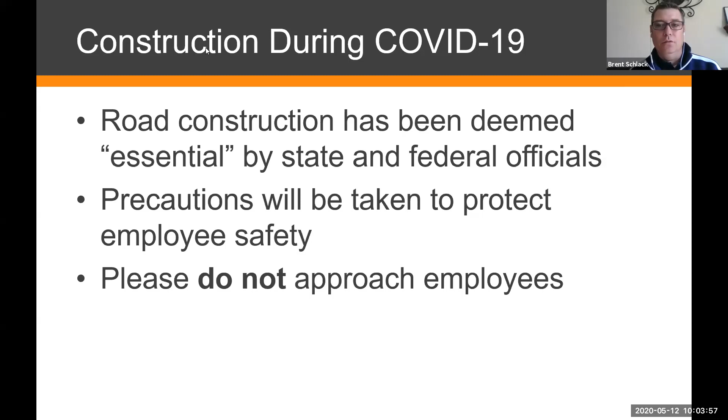So we're here for the Textile and Woodland Roundabout project. If you can move forward to the next slide—just some background on the project.

We applied for a safety grant through MDOT, actually back in August of 2017, so it's been a little bit of time. That was through me and my staff where we applied for it. Unfortunately, the safety grants are reactive type grants, so based on the crash histories and some of the crash patterns that we've seen out there, that's the reason we applied for this money.

During this process, we applied for two scenarios: a center left turn lane on Textile Road turning onto Woodland, and then our preferred alternative, the roundabout, which is what got selected.

The funding was awarded in February of '18, and since that time we've been working through design plans leading up to construction. The grant we were awarded was a 90-10, meaning 90% funded federally and 10% matched by the locals.

This 10% match is being shared between us at the Road Commission and the City of Saline. Also, this grant can only be used at this location—it's a capped grant. So what that means is we have a certain amount of funding, and anything above that amount is the responsibility of the locals.

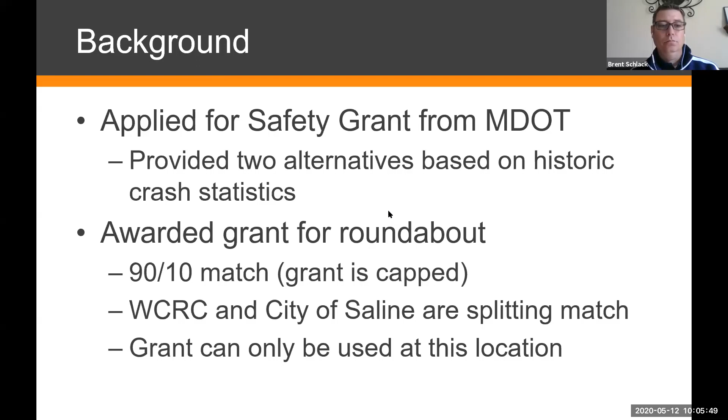Go ahead and move to the 'why a roundabout' slide.

The reasons that we started a roundabout were due to the history of some of the crashes that we've seen at this intersection, and some of them have been serious. Unfortunately, we had those serious crashes, and roundabouts do an excellent job of reducing or eliminating these serious, severe crashes. It also provides some traffic calming.

The roundabout slows the traffic down as you enter, and it can reduce congestion and help traffic move more efficiently. Another reason that we like the roundabout is just to the east of the intersection is a pedestrian crossing.

The roundabout fits really well with this pedestrian crossing because we can have a splitter island, and Michele will go through some of the construction on what those are. But those splitter islands provide some refuge for the pedestrians and allow them to cross one leg of the intersection at a time, or one leg of each lane at a time.

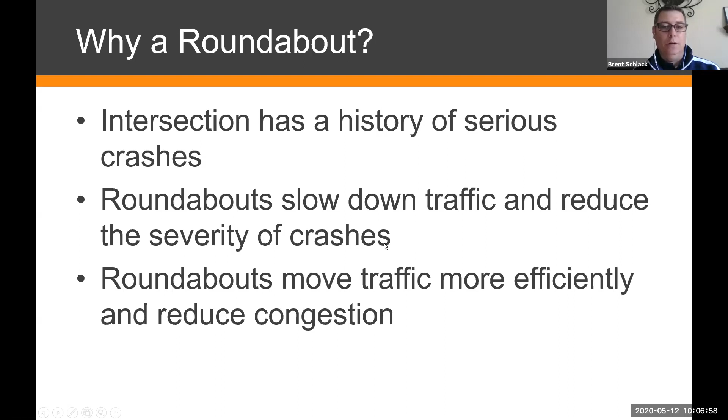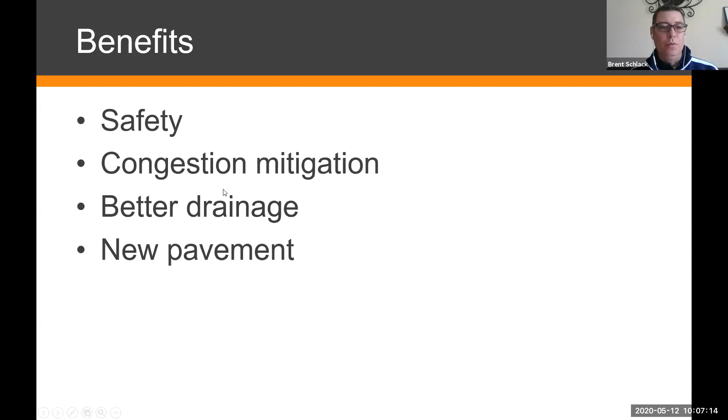Some of the safety benefits that we're going to see through this project are, of course, safety, with us choosing the roundabout, and the congestion through the roundabout. And then the improvements that we're going to see are better drainage and, of course, new pavement.

Thanks, Brent. Now I'll pass it on to Michele, and Michele can talk about the next step in the project, which is the construction.

If some of you are familiar with the area, you may have seen earlier this spring, we removed the trees that were required to be taken down for the project, and we were very careful which trees we targeted. They are the only ones that were absolutely required to be removed.

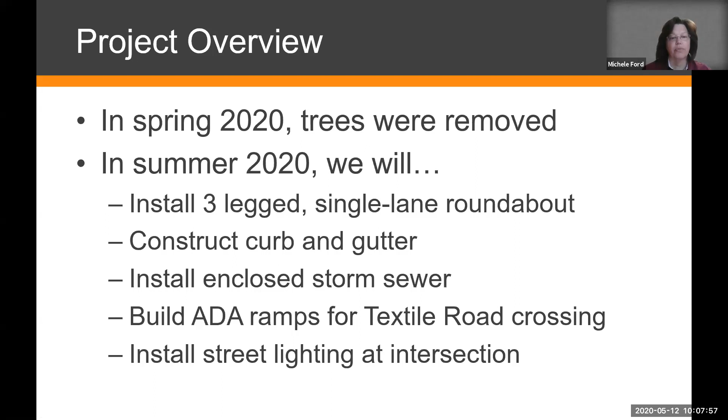This summer, we're going to install a 3-legged single-lane roundabout. It'll have curb and gutter with some enclosed storm sewer that'll help with the drainage. And then we are going to build ADA compliant ramps for the Textile Road crossing, and street lights will also be included as part of the intersection.

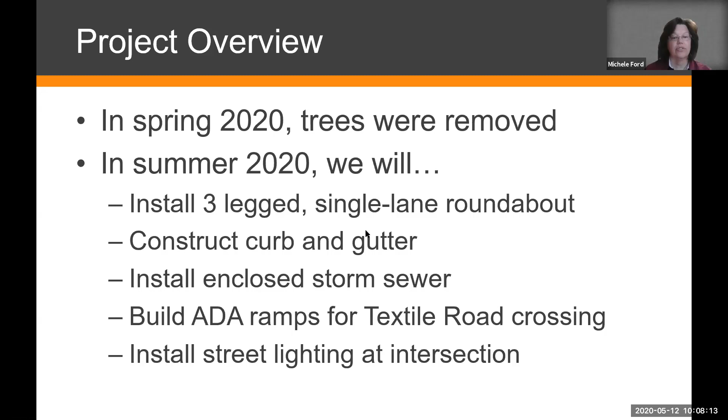We're going to install 3 different crosswalks, one on each leg. The crosswalk on the east leg is going to connect to existing pathways and sidewalks. The other 2 crosswalks are for a future pathway that is in development by Pittsfield Township.

I just included a few slides with kind of milestone construction that you'll see. The contractor will decide the exact timing of these, but it'll give you an idea of the sequence of construction. So once we shut down the intersection, we'll be removing the current pavement.

All of that will come out, and then they will start to begin the grading, install some of the storm sewer to get it ready for the other aspects that are going to be going on.

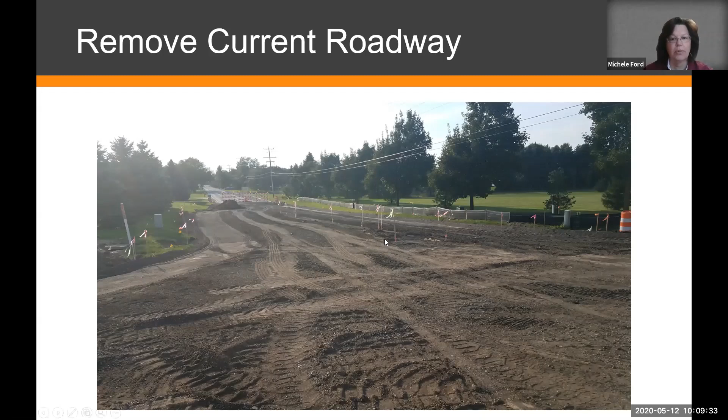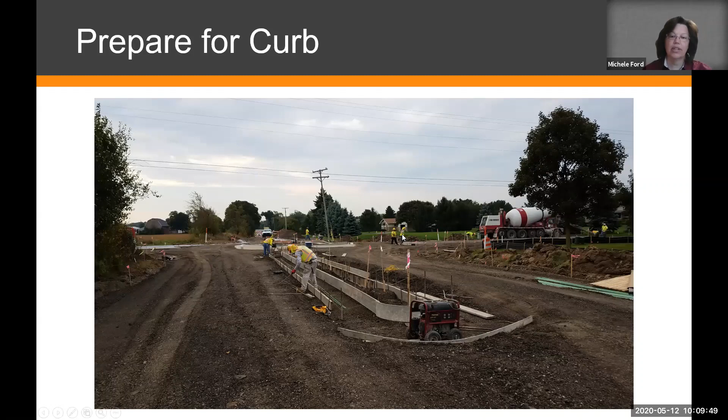Then you'll see the curb — they'll have to put in forms so that they can pour that curbing, and drainage structures will be installed around the same time that they'll be doing the curb forming.

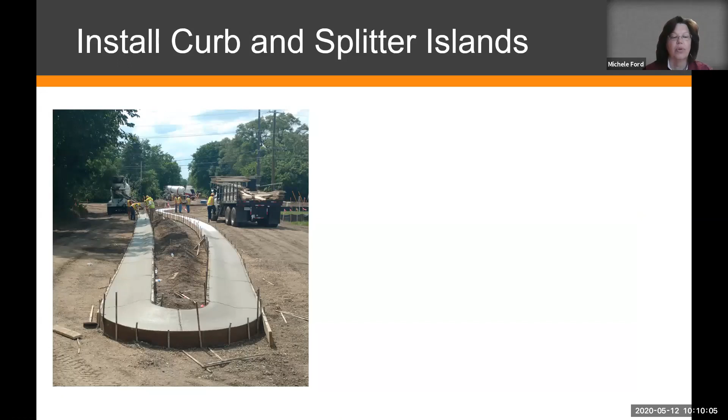Then they're going to pour the concrete, and it takes a while for the concrete to gain sufficient strength, and it can easily be damaged. So this is a really important time that we make sure we do not work too closely to that new concrete, because we don't want any damage on it.

Once the concrete reaches the desired strength, we'll go ahead and fill in the middle with more concrete, but it's going to be a red color to help improve visibility as you're approaching the roundabout.

We'll have a central island, as you see on all the other roundabouts. It too will have a red coloring. This helps with visibility. We are not going to have any landscaping in the middle of this one. That's to keep our sight distance, but it also helps with long-term maintenance, so we don't have to worry about keeping that mowed or having any agreements on the maintenance for that.

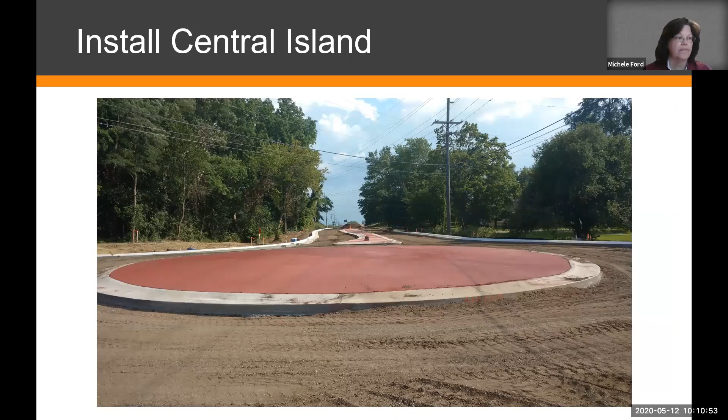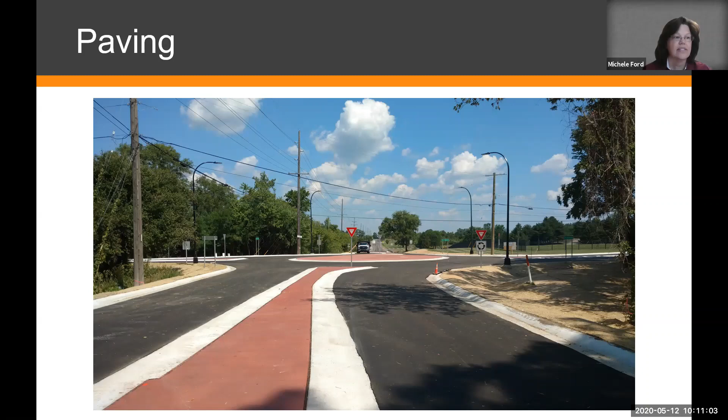And then paving will come along. They'll put down asphalt paving. They'll do the permanent signs at this time, and all the roadside ditches will be completed.

And then the pavement markings will come in, and a lot of these are becoming familiar to Washtenaw County motorists. You'll see the yield word go in, the arrow symbols that go around the roundabout, and also the crosswalks. At the end of the splitter islands, there's yellow cross hatching to help guide traffic as they approach the roundabout.

And then street lighting is also going to be on there. You can kind of see the street lights around the roundabout on that particular one.

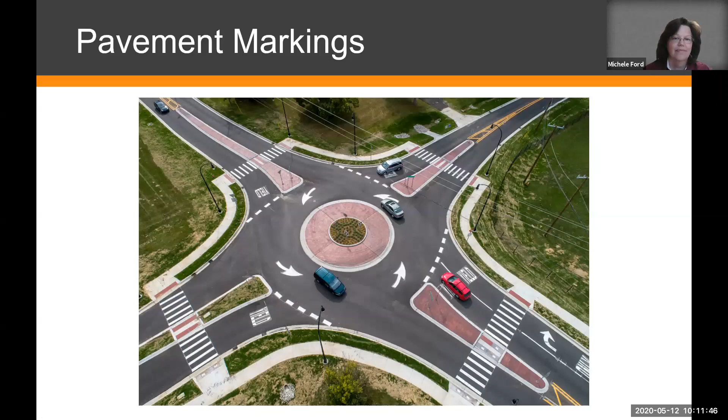Our timeline is we're going to start mid-June. We don't have an exact date yet, but we will be putting changeable message signs out approximately two weeks before we start construction, so you'll start to see that.

We also will be putting out project alerts. If you sign up on our project page, you can get an alert that the project will begin, and it'll also start to appear on our weekly road work schedule. We plan to be completed by the end of August.

The contractor generally is allowed to work Monday through Saturday from 7 a.m. to 7 p.m. They work some Saturdays, they may not work all, but in general we do not have Sunday work occurring.

And impact to traffic, there is going to be an impact to traffic. The intersection is going to be closed for approximately 8 weeks to all traffic. That includes pedestrians and bicyclists.

We have found recently that pedestrians and bicyclists don't always think that the closure applies to them, but it does as well, and that is for the safety of the traveling public. It's also for the safety of our workers, and it protects our new construction.

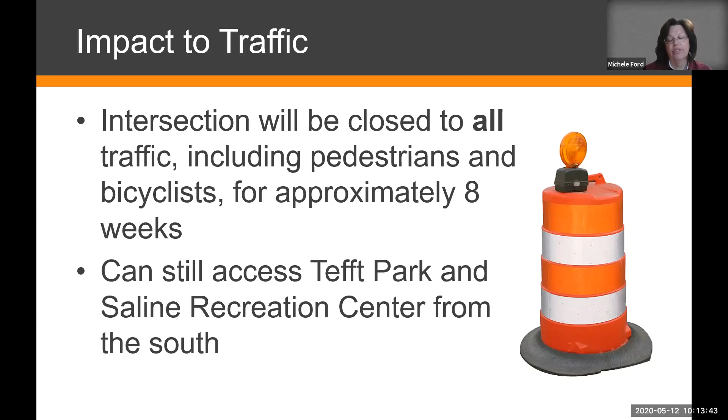We have had some recent occurrences of vehicles and/or people entering closures, and we have had damage that's resulted with a large cost implication, but also a time implication - it increases the length of the closure, and we would like to get this done as quickly as possible for everyone. But you will still be able to access Tefft Park and Saline Recreation Center from the south, and the contractor is required to maintain access for emergency vehicles.

This is a general picture of our detour. It'll be along Maple Road, then to Ellsworth, and then to Lohr. The Woodland Drive traffic will be directed toward Maple, and then they'll follow the detour from there.

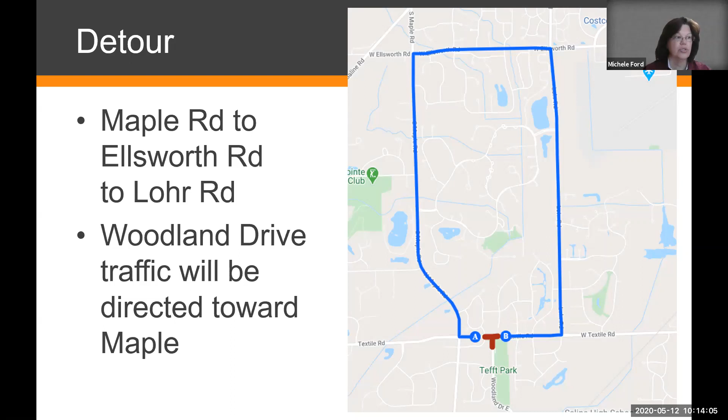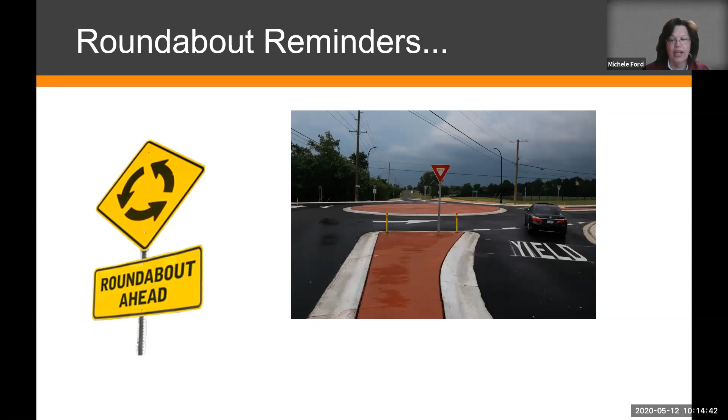Some roundabout reminders: we know that some people are still uncomfortable traveling in a roundabout. So one of the biggest things we want to remind people is that as you're approaching the roundabout, you are to yield to the cars within the roundabout. A yield sign means that you should slow down, stop when necessary, and then defer to the oncoming traffic. The vehicles within the roundabout have the right of way, and you are not to merge.

It's a yield, not merge. Just remember that yield is your shield as you are traveling within the roundabout.

Some people encourage pedestrians that are walking through roundabouts to do that, so that they know that driver sees them and they're making eye contact.

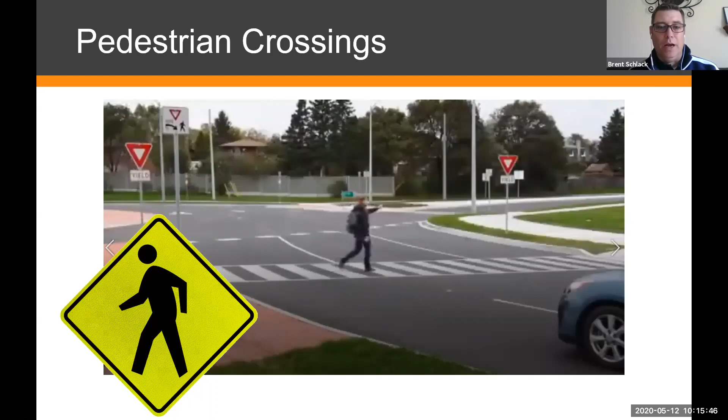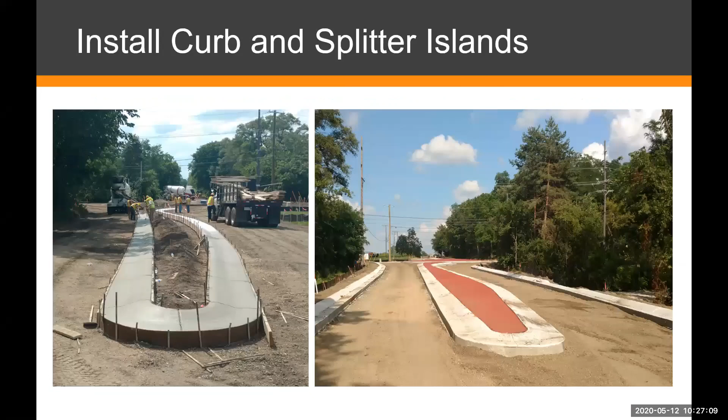There it is. Okay, so the curbing, we'll have curbing all along through the roundabout area.

So pretty much around most of the project. Brent, do you have anything? It's hard to explain just from this. So does it go all the way down to Silver Maple and McCormick?

Yes. So the curb will go from the roundabout, and it'll go around the radiuses of Silver Maple and McCormick, and it'll go all the way down to Tefft Park, and for the entrance to Tefft Park. And to the east, it looks like it'll go just to the end of the splitter island, which is the red portion. Yeah, so it'll go right to the end of that is where the curbing will go.